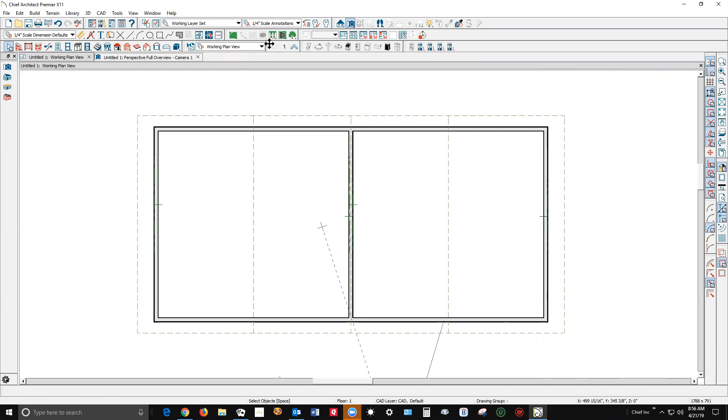Hi, I've got my X11 open and I put together a mock-up of what you did, where you need a roof cricket in the center. I thought I'd demonstrate how I do this. There's no tips or tricks particularly, just knowing your tools and knowing the product you want to get.

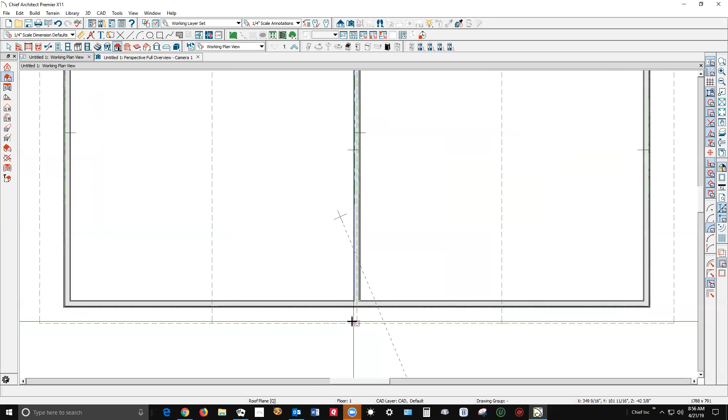So the next thing I'm going to do is go over here and click on the roof tools to make them active. I'm going to draw a baseline on this edge, and I want it to slant in this direction. I don't want it over the wall, I want it over the existing roof plane. So I'm telling the software that's the product I want. Now I'm going to do the same thing on the other end.

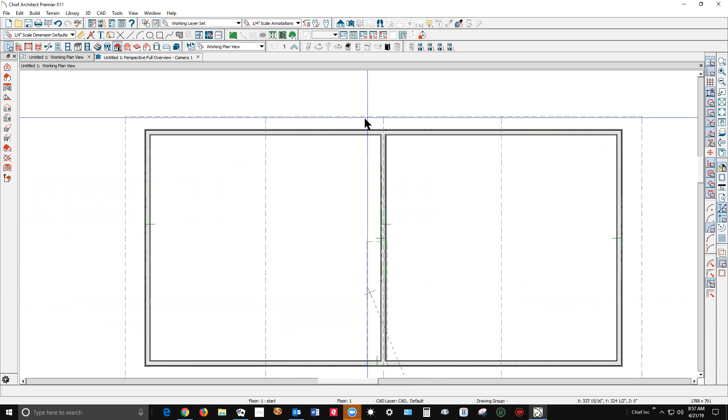Click that again to make it the active tool. Same thing, over existing roof plane. Right, okay, let's take a look at that.

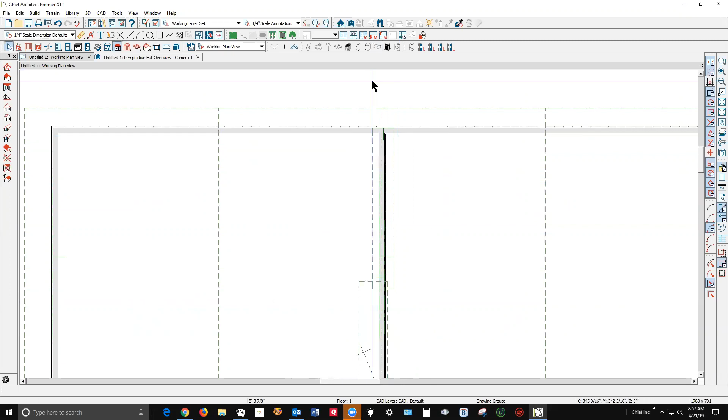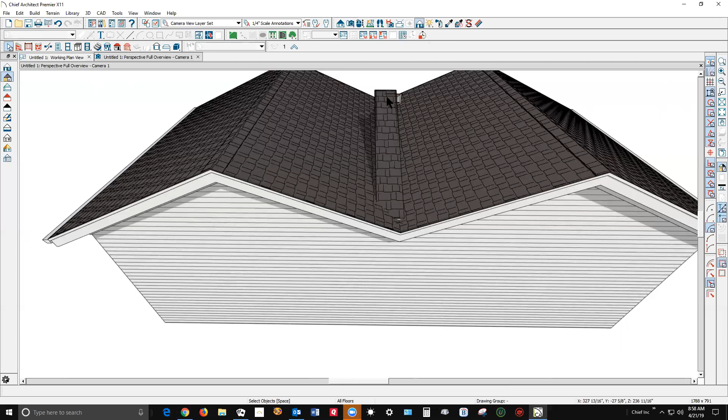Let me change to vector view. You want your cricket to terminate right here, so that there's no dead valleys, and you don't want its ridge higher than the main ridges that you're saddling.

So next thing I'm going to do is, roof saddles are generally triangular shaped, so I'm going to make this into a triangular shape instead of a rectangle.

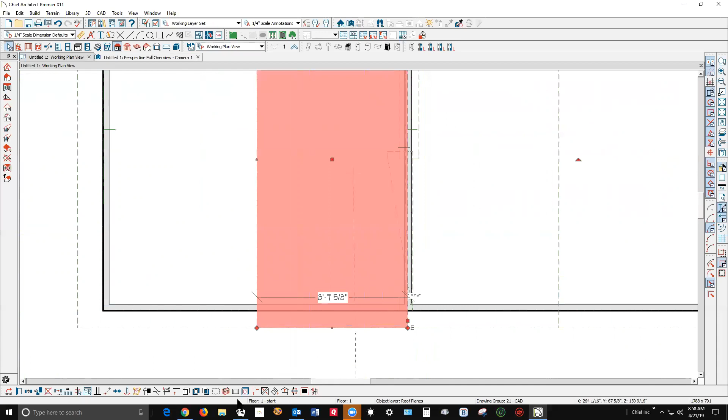I'm going to click on this roof plane, use join roofs, and well, I guess what I ought to do first is take this and split it up with the break line tool. Just break that in the middle, so that we have a line entity here to connect with this one, and a line entity over here to connect this side.

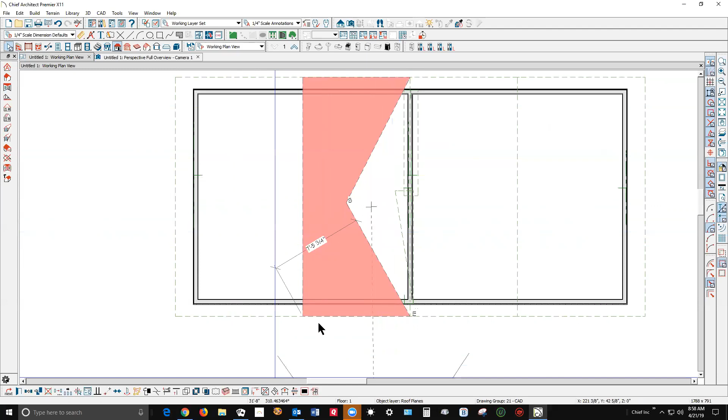We'll just left click. Okay, that's too high. I don't want this ridge overtopping the main ridge, so I'm going to undo that. Then take these two roof planes and drop their pitch. They're all 5/12s. I want the saddle underneath the main ridge.

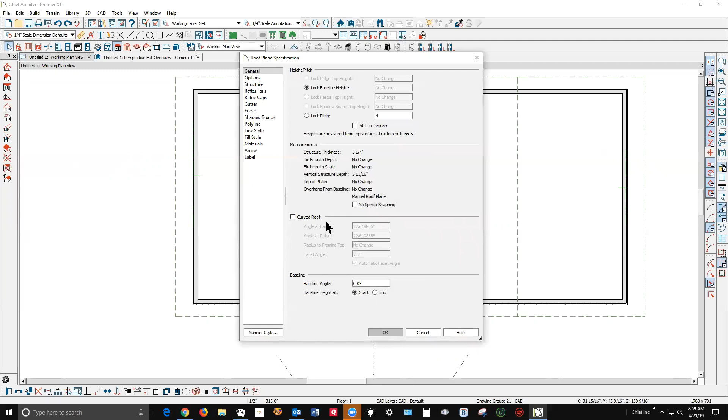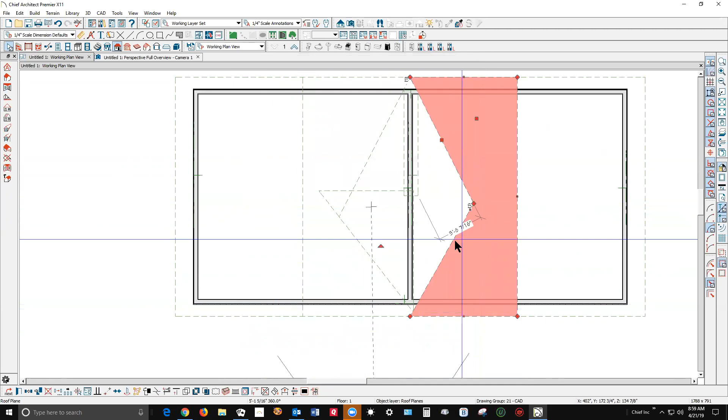So now I'm going to tie this in again. See, that doesn't overtop the ridge, and that's more like what I really want. I'm going to do the same thing, mirror image, on this side, and select this side of the saddle.

Okay, I'm going to go back to the camera. You see this developing. I may make this look rather easy. It's not particularly easy, and it's not yet perfect, but that's what comes next.

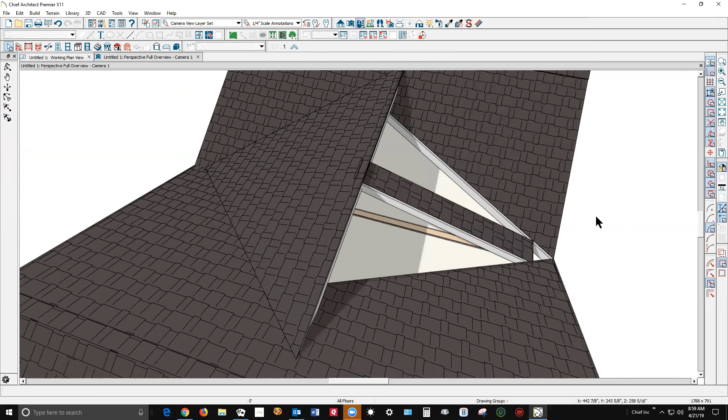I'm going to take this in plan view. It's easier to do in plan view, so I'm going to go over here and again make this into an isosceles triangle.

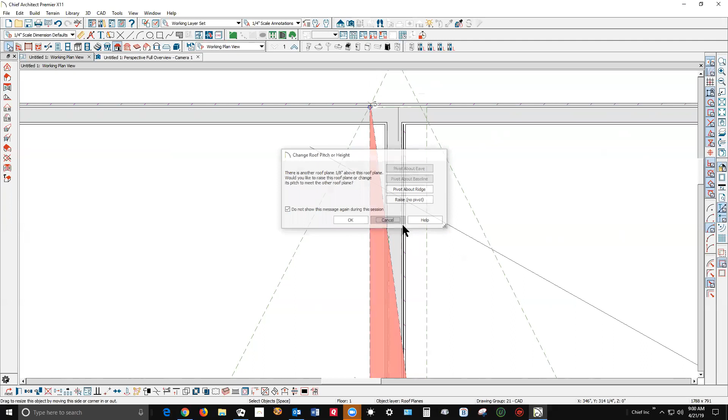It doesn't matter where you put the end of the triangle. This thing pops up from time to time. I've never found it does anything helpful, it doesn't do anything but waste time. So I just say don't show this again, cancel. Get out of my face.

Okay, now I'm going to join roofs and join roofs. And now we're going to do the saddle ridge. We've got, see, it's close. It's not perfect. How do you fix that?

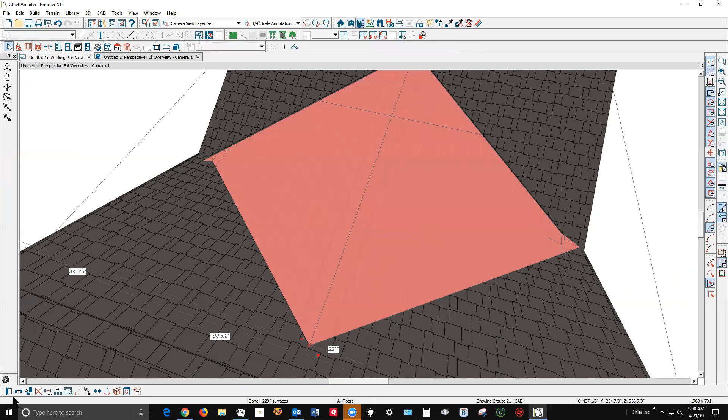Okay, well, I'm going to take this and shift select them, and then move them up 2 inches, and then reconnect and see what that does. Oh, see, it moved it further out towards the edge.

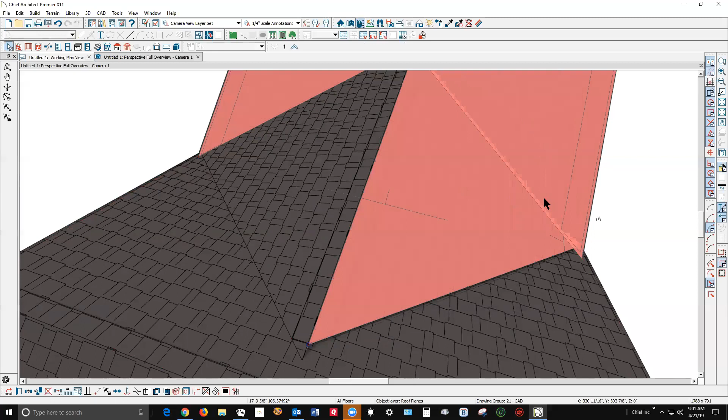And I've done the same thing here, so I'm going to tie it in the edges again. Okay, that was too much on this side. Looks like it's not perfect.

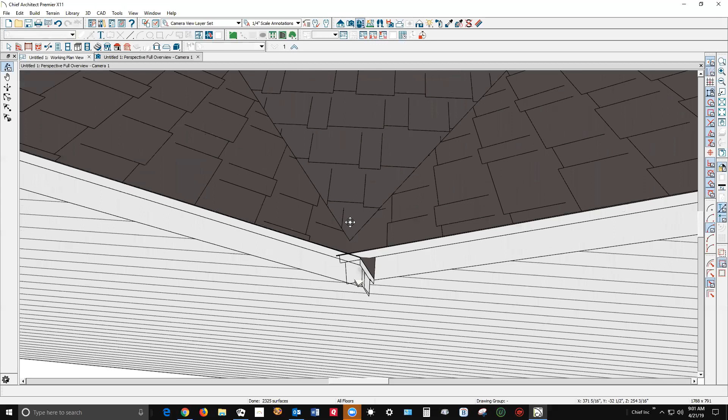Let me swing over here so I can view this a little better. What is that? Oh, okay, I screwed up. I need to get rid of that break and then reconnect this edge.

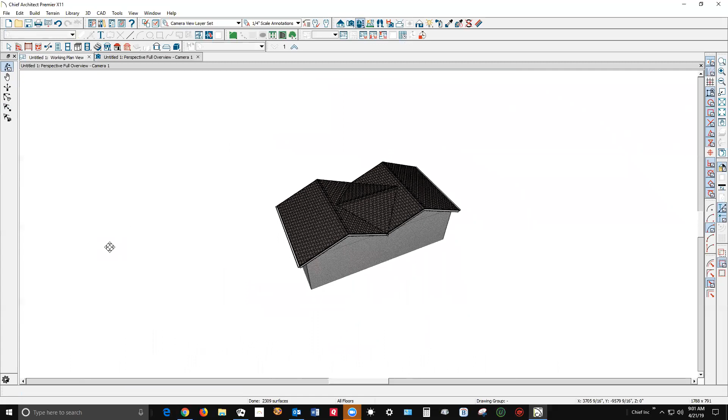Okay, that's real close. Not perfect, but real close. Let me see if I screwed up on this side. Yeah, I did the same thing over here.

So I'm going to get rid of this additional break that I missed, pull it to the edge, and then reconnect, so I can evaluate what I actually have here. See, that's too much.

Let's see, that camera thing's in the way. Let me move it out of the way. Yeah, so we're good here.

We're not good here. So I'm going to take that roof plane and raise it up an inch, then reconnect.

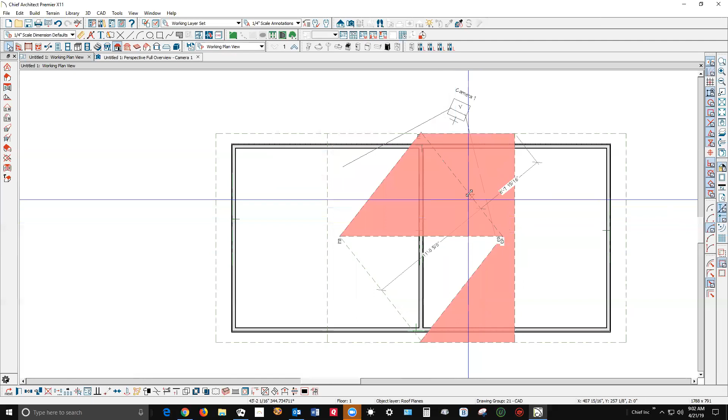Okay, I think that's the wrong direction. Yeah, that made it worse. So I'm going to take this and transform replicate it, and lower it 3 inches, and then reconnect.

That's even worse. All right, let's go plus 6. Like I said, this is not a precise science, I always find it to be kind of trial and error. Oh boy, that's a way wrong direction.

Let's see, I raised it up and it got worse. Let's go minus 12. You make a change and then you tie it in the edges. See, that's more in the right direction. And that gives you data to evaluate the change. Okay, that 12 was too much.

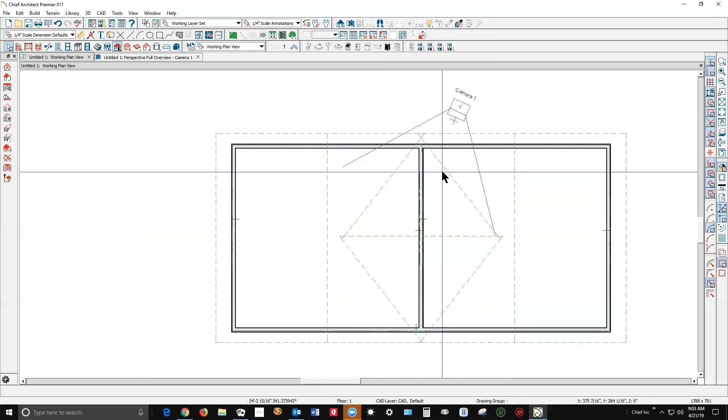I'm going to raise it 2 inches. Okay, this looks like it's going to be real close. Oops, wrong command.

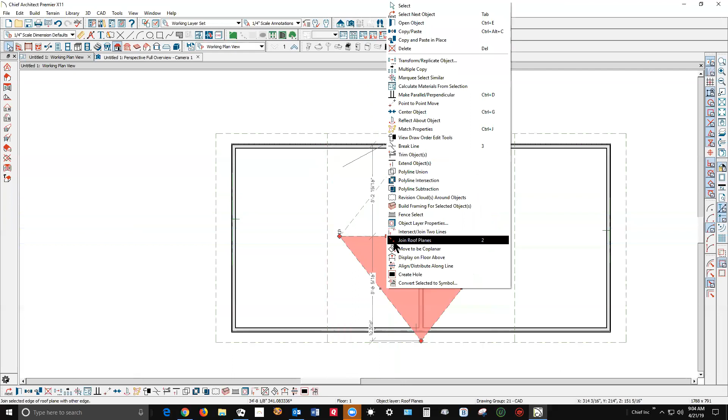And then reconnect the ridge because I've been moving it around. Okay, that's not perfect, but it's pretty close. Let's see.

I think you get the idea. I wish there was an easier way to do this than trial and error, but I haven't figured out a way. And trial and error always works for me, so I'm going to raise that 2 inches and see what happens. If it gets worse, then I'll know I need to go the other direction. Yeah, it got worse, okay, so that was 2 inches.

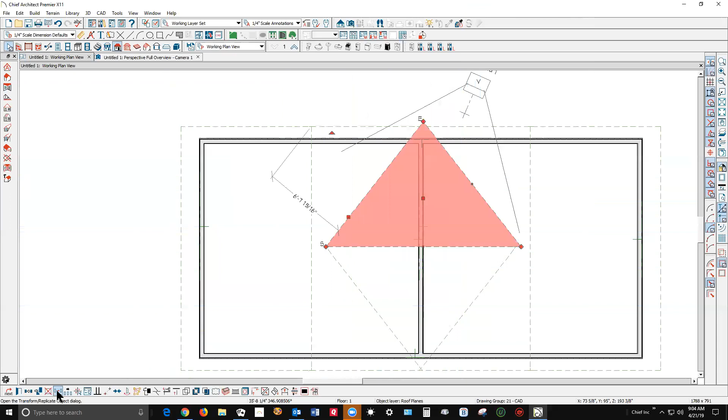So I'm going to lower it 4 inches, done, 2 inches below where I moved it to a moment ago. That's more like it. And reattach the ridge.

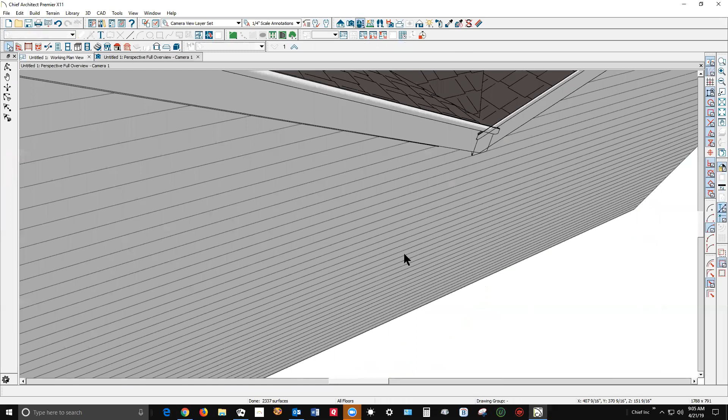I think that's good enough for this demonstration, and that's how I do that successfully all the time. So that's what I recommend to you, and I hope it works for you. It's a skill worth developing. There's no tips or tricks or dialogue boxes, there's just your knowledge and your control of your tools, and just staying at it until you get the product that you need and want.